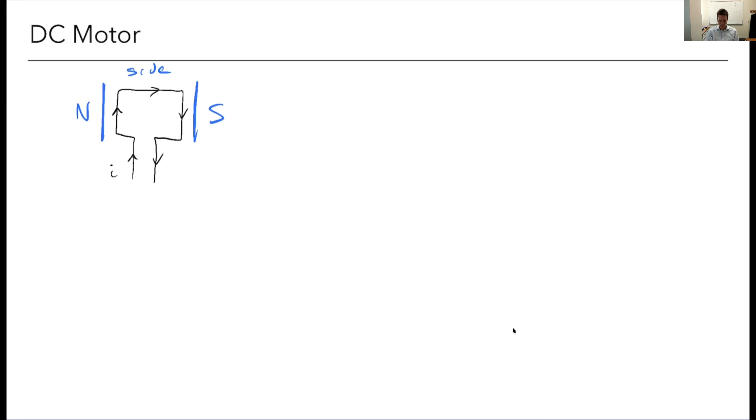And the magnetic field goes from north to south, creating a magnetic field in the direction shown by the blue arrow. And we'll call this B. That's the normal symbol for a magnetic field.

So if I have this current moving through a magnetic field, you may remember that this is going to create a force—this is a Lorentz force. So in the motor, this part is fixed. These are permanent magnets. And this current moving through a wire creates what's called an electromagnet.

This current moving through this magnetic field is going to experience a force, the Lorentz force. Read this way, the differential force is going to be the current times a length along the wire, crossed into the magnetic field B. DL is just a length. If it makes it easier, let's just make it simple. We'll call current—normally we don't call current a vector, but just to make it simple here, we'll give it a vector. Normally it's the length that we go along the wire, but conceptually it's not really that different.

So here's my motor, and let me give—I don't know which side to call this. This is the side view. Let's say this is like a top or back view. So this would be as if I was viewing it from this side here. I'm looking this way, that's my eye. So I'm going to see the wire. Here's the wires, and these are the magnets. So the magnetic field is still this way, but the wires are now going into the page. That's just a second view.

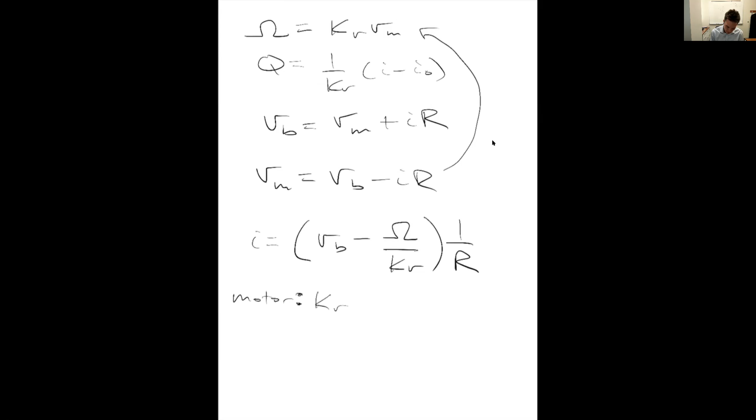The things that are going to be known: once I choose a motor, I have what are called the motor constants. It's going to have some kV, some resistance, and some no load current. And for my battery, once I choose one, I know its voltage. So in this equation, resistance is known, that's a property of my motor. kV is known, that's a property of my motor. Vb is known, that's a property of my battery, along with my throttle, as we'll see, we can change that voltage of the battery, throttle up and down. So this gives me a relationship between current and my rotation speed.

That's really just the one input there. Once I know my current, so let's say I choose a rotation speed as an input, I can get the current. And then once I have the current, I can solve for the torque, going up to this equation here: kV is known from the motor, I naught is known from the motor, I just calculate current, I get torque. So now I have torque, and then I can get power.

So what is power? Remember from elementary physics, power is like force times velocity. For an angular, rotating device, it's going to be an angular force times an angular velocity. So power is torque times omega. So now we have both of those things. And then finally, we want our efficiency. The efficiency of my motor is going to be power out over power in.

Power out, this is my mechanical power out, torque times my rotation speed. And what was the power in? Well, that's coming from my battery, right? Remember power is I times V. So that's going to be I times my battery voltage. Okay, so that's the power in, the power that I'm putting into the system.

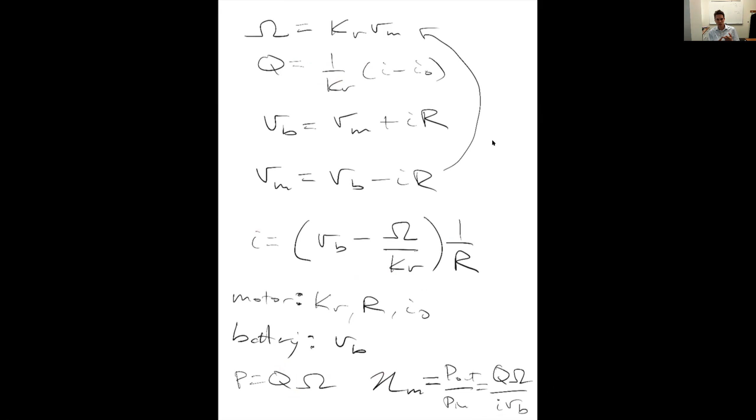So that's my efficiency. To recap, once I choose a motor and battery, I have these constants, and then I plug them into these equations. First I get my current, from my current I get my torque, from my torque I get power, from power I get efficiency. So now I can compute all the properties I care about for a motor: what does the torque curve look like, what does the power curve look like, what does the efficiency curve look like? Okay, so here's an example.

You can go compare this to yourself later if you want to run through some of these calculations, see if you get the same thing here.

Well, we have to go back and think about the equation. Remember, we've got this battery here, right? It comes around, resistance, and there's a back EMF here. There's kind of this trade-off, right? Because battery's got to overpower back EMF of the motor and overcome this resistance.

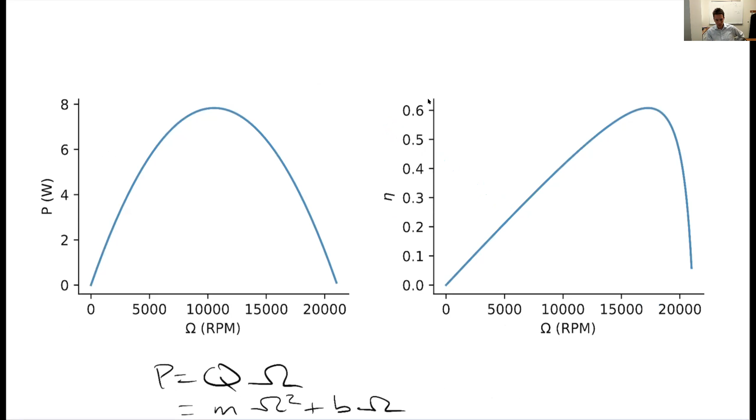All right, so this is just trying to give you some intuition. Motors are maybe a little less intuitive, at least for me, as compared to the propeller side. So you have to let that sink in a bit.

Let's talk about propellers and try to understand them. We're not going to get into the aerodynamics of predicting how a propeller behaves—if you take the aerodynamics class, we do get into that. Instead, we're going to look at some data for propellers and learn how to use that data to choose an appropriate propeller.

We're going to do this by looking at a data site at UIUC, University of Illinois at Urbana-Champaign, which has a nice website with a bunch of propellers and tabulated data. For each propeller, we'll have two numbers: the diameter and the pitch. The diameter is self-explanatory.

If we take the rotor area and make a circle, that's the diameter. The pitch, you could think of it like the same idea with a screw—if you put a screw through wood and it twists, the pitch is related to how much it moves forward with one full rotation. Similarly, the pitch of the propeller is related to how far it would move as it rotated, as if moving through a solid object.

The things we're going to find here are a bunch of aerodynamic data, and as you'd expect, it's all going to be non-dimensional. So we'll have thrust coefficients, that's CT, power coefficients, things that are normalized, and they're functions of normalized or non-dimensional parameters—maybe things like Reynolds number or Mach number. Mach number won't get too high, so that's not relevant. Reynolds number does matter, but the variations aren't too large, so we won't worry about it. It's basically just a function of, for a given geometry, this parameter J that we'll see in a second.

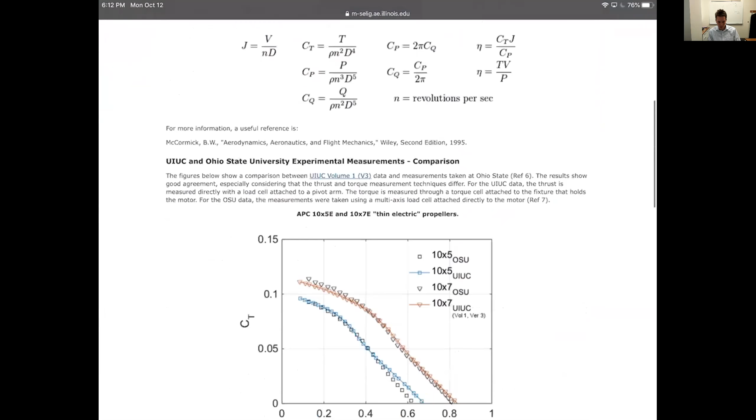They're showing three things. One is the thrust coefficient, that's CT, as a function of J. There's a power coefficient, also as a function of J. And then there's an efficiency, also a function of J. Efficiency has that typical behavior where it has some peak somewhere—there's a trade-off where you don't want too much or too little.

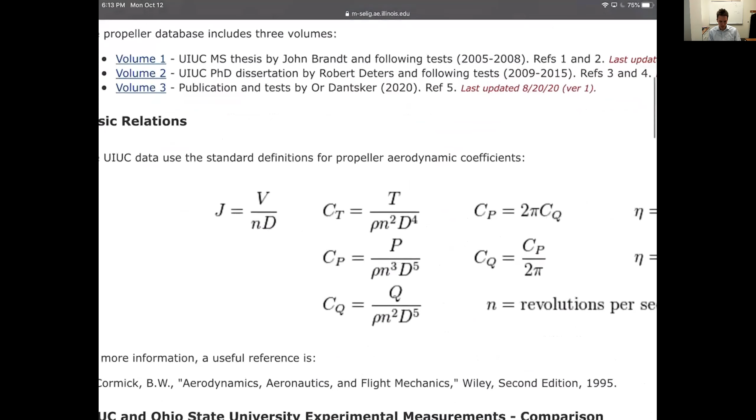So what is J? J equals V over ND. V is my forward speed—as the propeller is moving through the air at some speed V, or it's the speed my aircraft is flying at. Or if you're in a wind tunnel, it's the opposite: the propeller is stationary and that's the incoming free stream speed.

ND, you can think of it conceptually this way—it's not exactly this because of convention, but my tip speed would be omega times R, the rotation speed times my radius. So J is a ratio of my forward speed to this rotation speed, how fast the blades are rotating. Not exactly that, because it uses D instead of R, and this N, which to me is kind of an unfortunate choice, but it's convention.

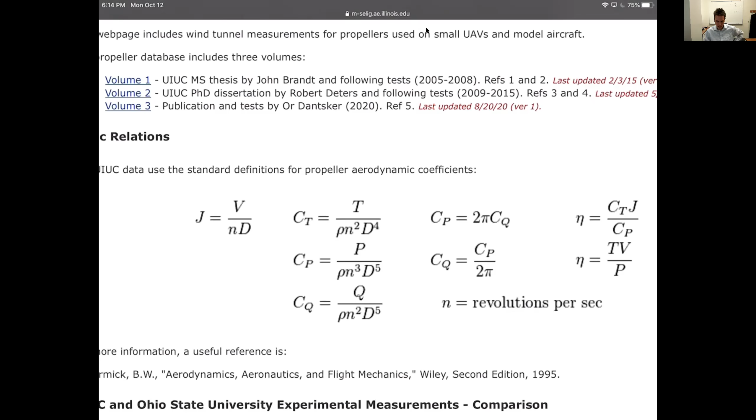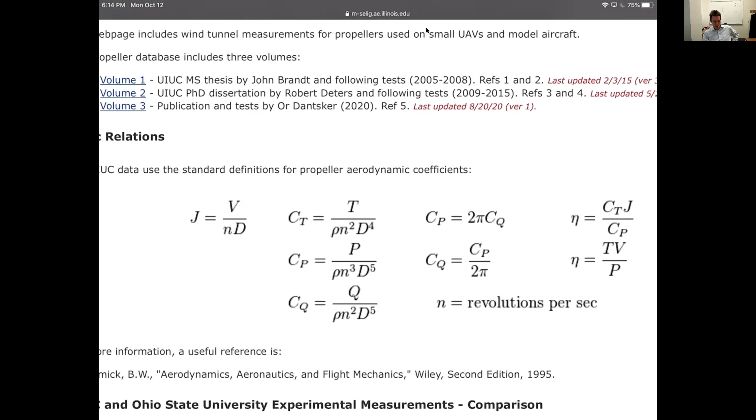It's not RPMs and it's not radians per second—it's somewhere in between, revolutions per second, as we see right here. So just be careful with that. Again, not revolutions per minute, not radians per second as in standard SI, but halfway in between: revolutions per second. This is just a convention, it doesn't really matter—it's just a proportionality constant, but this is how we define what's called the advance ratio.

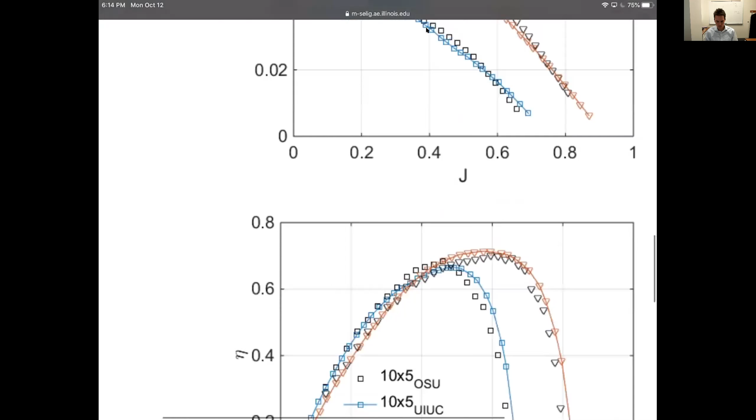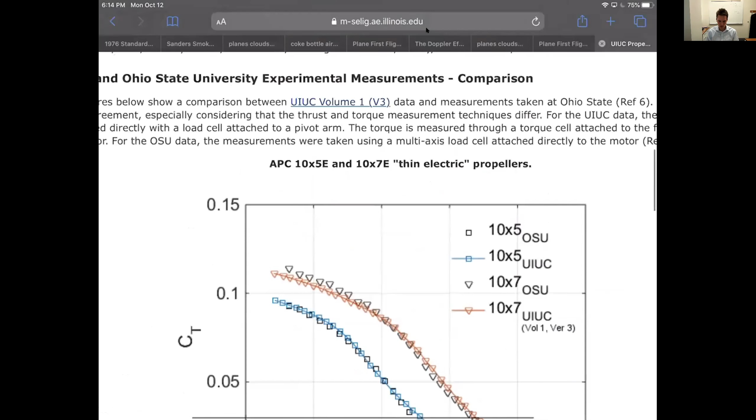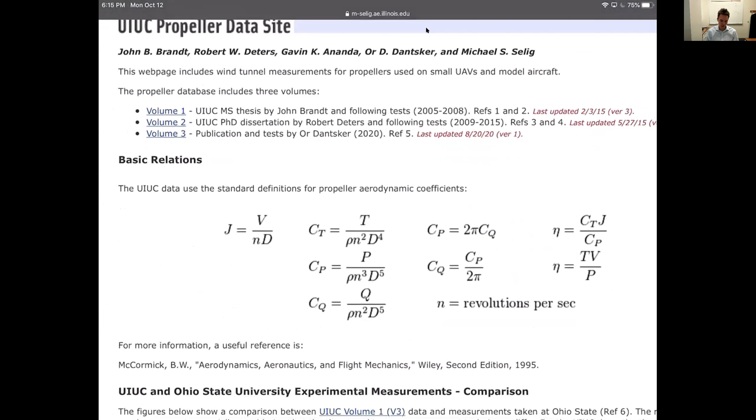Okay, so we can see how some of these things are normalized. Again, these are different from how we've been looking at some of the other force coefficients. This is not dynamic pressure, it's just normalized a different way, even though this is a force. Again, these are just conventions - this is a density, this is revolutions per second, and D is a diameter. So you just have to get used to these.

There's a thrust coefficient, power coefficient, torque coefficient, and you can see that power and torque coefficient are just related by a constant. And then efficiency.

Efficiency here is different from the motor efficiency. The motor efficiency was power out, which was torque times rotation speed, divided by power in, which is from the battery. So we went from battery to rotational power.

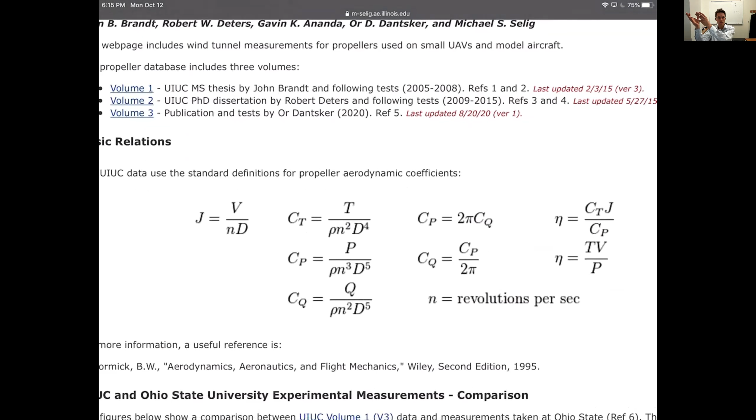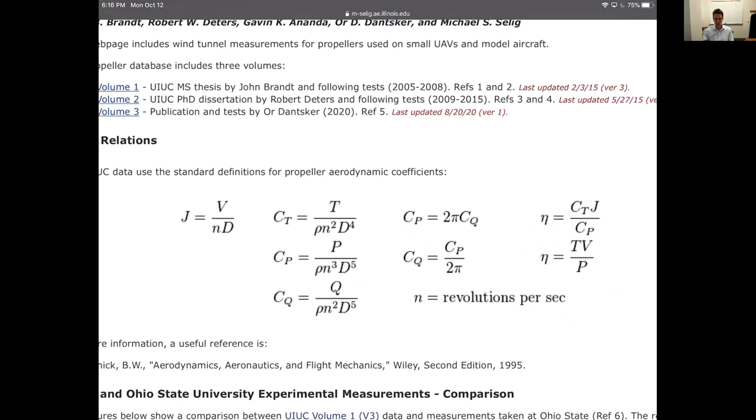Here, my efficiency is from my linear power relative to that rotation power. So we're going from this rotation, but the power I care about from the propeller is how much I'm moving forward. That was the whole point of this propeller - creating thrust to move me forward. So this is my thrust, force times the velocity, thrust times my flight speed. That's the power out I care about from a propeller, divided by that power in, which is the same as the power out from the motor - the torque times omega.

Okay, so let's dive in and look at some of these. Here's volume 1 - these are just different propellers, with a whole bunch of different names. Notice I've got these two numbers again - remember what these are. The first number is a diameter, in inches, and the second one is the pitch. So let's say I pick this first one here.

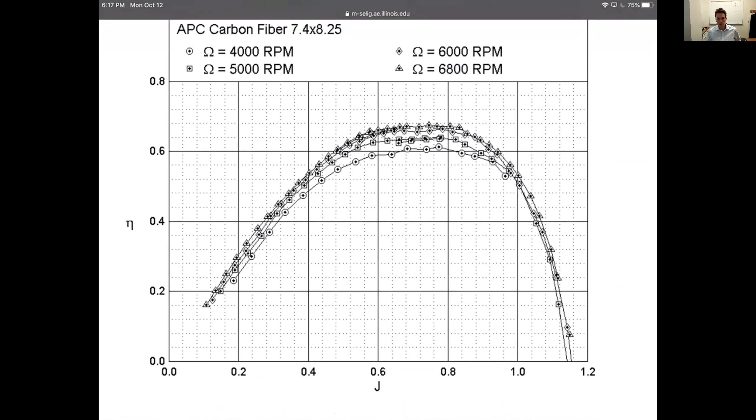I've got the main ones I care about - I'm not going to worry so much about the static ones, that's going to be hover cases. But this wind tunnel one, that's my forward flight speed. I've got this first one, eta, that's efficiency - so here's my efficiency versus advance ratio. I can see this has been done at a few different RPMs, or a better way to think about it, at a few different Reynolds numbers. There is some variation, but it's not super large.

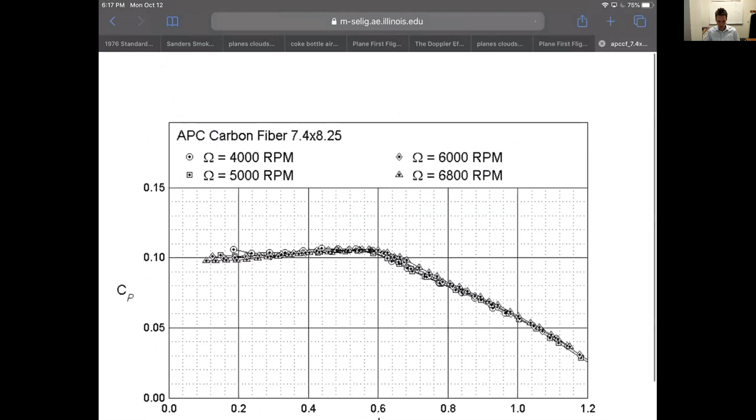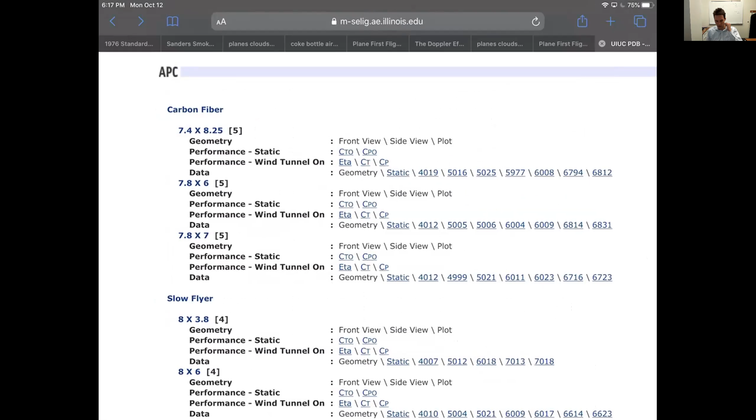Thrust coefficient here, similarly - I can see thrust coefficient as a function of advance ratio. And then finally, power coefficient, and you can see there's very little variation between the different Reynolds numbers. If you wanted to get specific numbers, you'd have to pick one of these RPMs, maybe corresponding to a Reynolds number. Like I said, it won't be too different, so you might pick something in the middle. I've got these tabulated data, and these are things we'll use later - these are just those same plots, just in tabular form. It'll be convenient to have actual data.

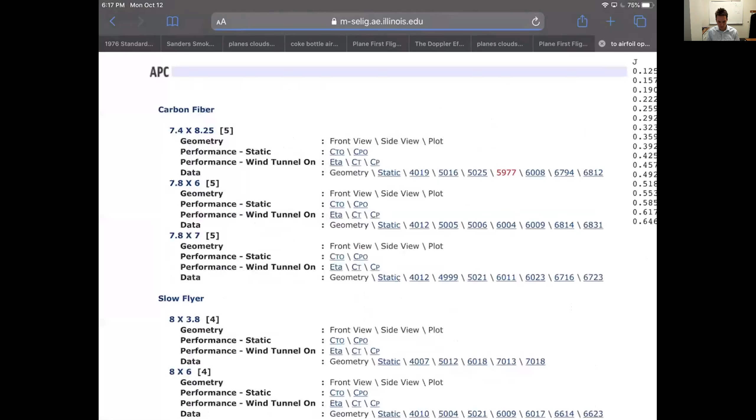Okay, so let's go back and look at some of these, and then we'll do an example. These are the kind of plots we'll see, just like we saw - I'm just plotting them together: thrust, power coefficient. But what we want to look at now is, although non-dimensional data is of course very important and more useful for tabulating these things, because they're universal, I want to look at my specific propeller and need to know if I have enough thrust to overcome drag - that's not non-dimensional. And I need to know that my torque is going to be a match for my motor. So I need to figure out these dimensionally.

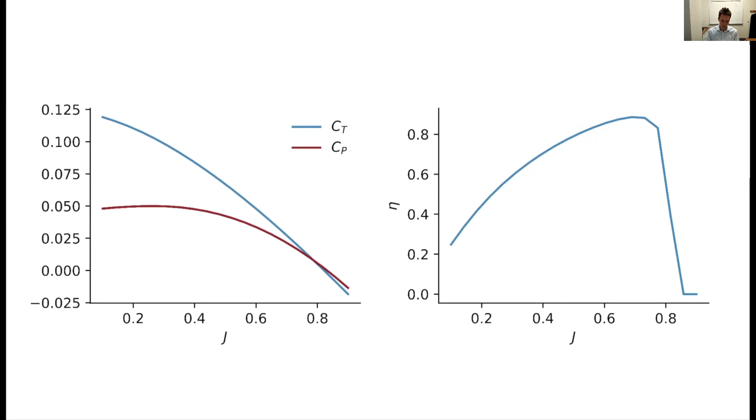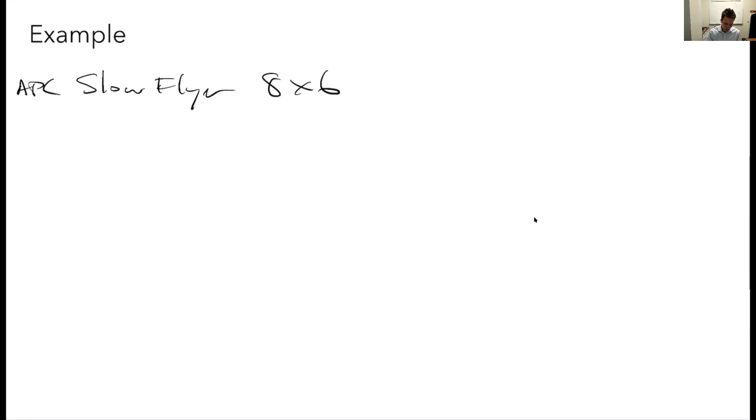So let's do that here with an example. Let's try to work out an example - I'm going to do this here on the fly, so hopefully this works out all right. The example we're going to do is, we're going to use the slow flyer. This is an APC propeller, slow flyer, 8x6, so 8-inch diameter, 6-inch pitch. It's going to be flying at 10 meters per second, and we're going to say it rotates at 10,000 RPM.

My goal here is to figure out the thrust, how much thrust do I produce. That might be useful to know because at a given speed I know what my drag is—we've worked out calculating drag from the airplane—so do I have sufficient thrust to overcome that drag? Let's try and do that.

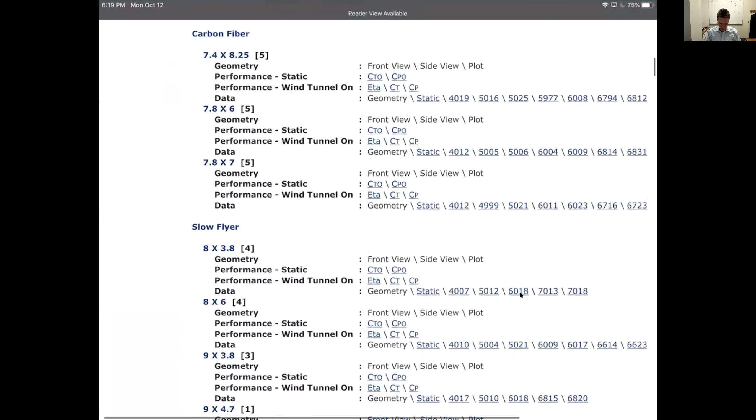Let's go back to that website. I said this was an APC, so I can click on the APC link here. Here's the slow flyer category, let's go down to 8x6, that's this one right here. And I'm going to look at the thrust coefficient.

Here's my thrust coefficient, and notice it's a function of advance ratio. So I need to figure out what my advance ratio is. Advance ratio is V over ND. V I have, N is in rotations per second, but say I've got rotations per minute, so I need to divide that by 60, which gives me about 166.7 rotations per second.

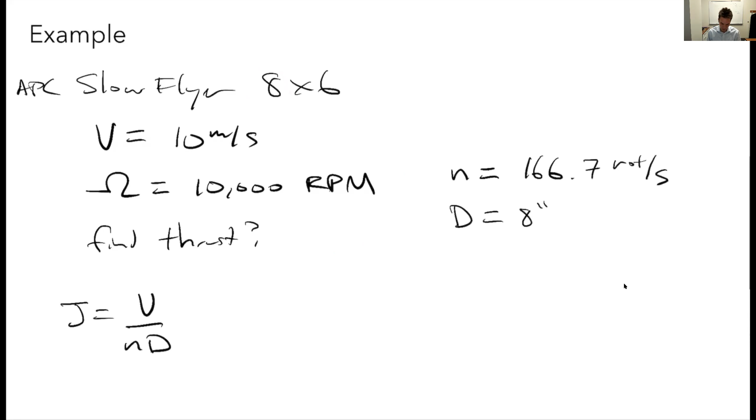D is my diameter, which is 8 inches. But I don't like working with inches, I like to stay in metric units, and my speed is already meters per second. So 8 inches to meters is about 0.2 meters. Let's plug that in: my advance ratio is 10 divided by 166.7 times 0.2, which is about 0.3.

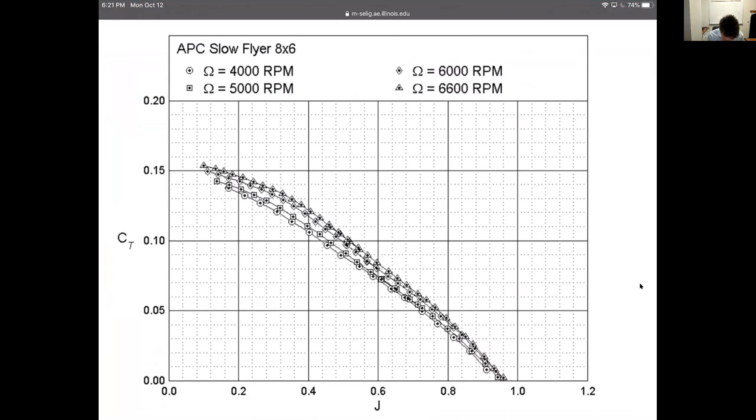Let's go back to that graph. That corresponds to, let's see—can't really use a laser pointer on this website—but it looks like on the thrust coefficient curve, I'm just going to pick somewhere in the middle of all those curves, about 0.13. So from my graph, that gives me a thrust coefficient of about 0.13.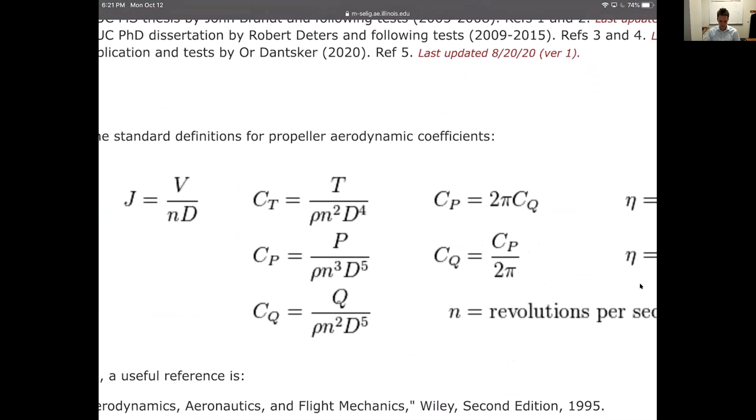But remember I need thrust, so let's go back to the website and look up the definition of thrust coefficient again. I'm going to go back to the main page. Here it is: thrust is going to be thrust coefficient times rho times N squared times D to the fourth.

I already have all of those except for rho. Rho is going to be 1.1, 1.2, or whatever, depending on your altitude, in standard SI units—kilograms per meter cubed. So let's plug all that together. I've got a CT of...

0.13. My N is—actually, here I got to be careful, I need to do this in radians per second, so I'm going to convert that because that's going to be my standard SI units. I put this all together: 0.13 thrust, the conversion from RPM to radians per second.

I square that, and then multiply it by diameter to the fourth, and then let's say a density of 1.2 or so. And if I did all that right, I should get... oh sorry, no, it is N, I'm going to do N. I don't... let me fix this real quick.

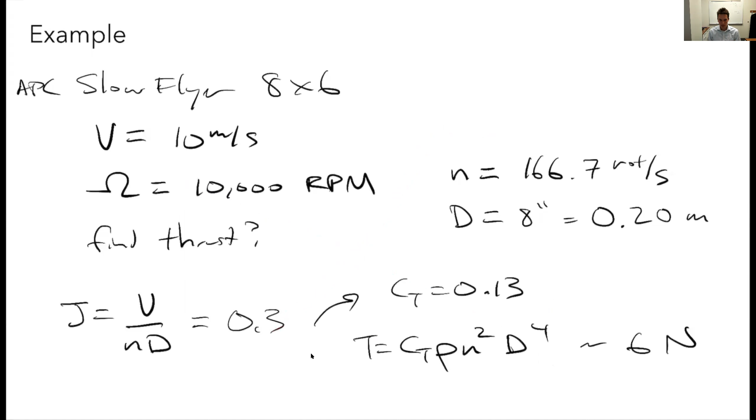Here's the key finishing thought. I now have all these curves for my motor and my prop, and the question is, so what? When I put the motor and prop together, they operate as one unit. The whole point of my motor is that I'm fitting the propeller onto the shaft, and that motor is driving the propeller - that's what's causing this to spin. The battery provides electric power, which is converted to rotational motion in the motor, and that drives the propeller, which converts that to linear power as I move the aircraft forward.

But the motor and the prop, because I put them together, do not operate independently. So I've got these two curves here, rotation speed for the motor, and remember how the motor drops in torque as we increase rotation speed, because the propeller increases. The question is, this combination, what do they operate at? The answer is where they intersect. If we think about that, it should make sense - if I put these together, they need to spin at the same rate, since the shaft is what's spinning the propeller, so they better be spinning at the same speed.

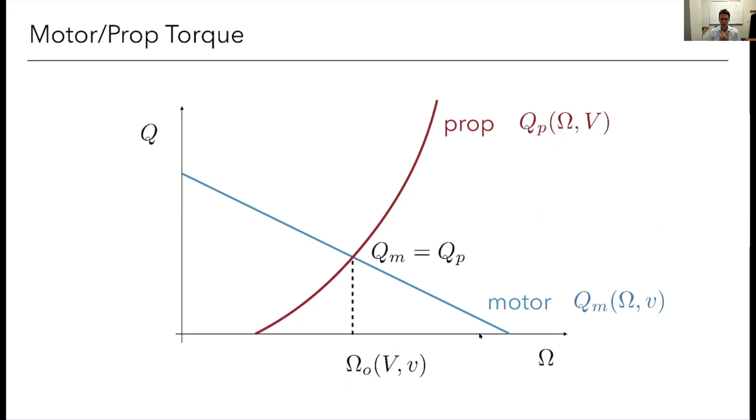So as we'll see, next time we'll talk about this a little more. Of course, I can change my voltage or my flight speed around, but that's going to dictate my omega. So we're going to talk more next time about how to choose an appropriate motor and propeller to give good overall performance.